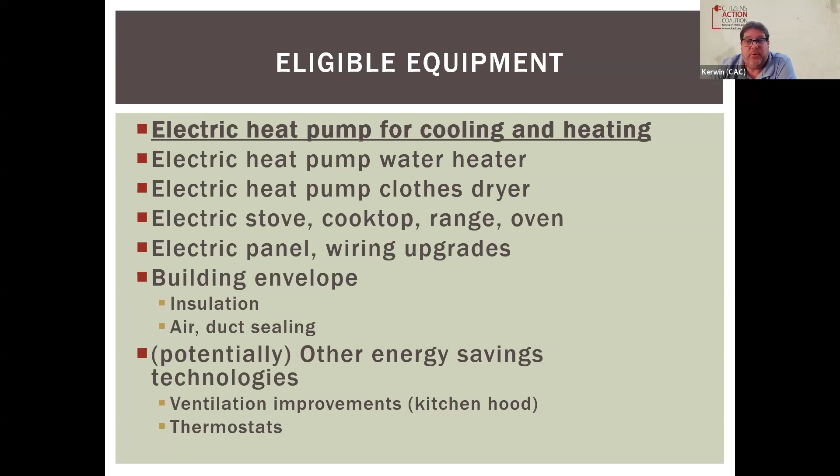Just real quickly, the home electrification and appliance rebates program. First of all, the first bullet there is about area median income, and that's an important data point to understand with respect to these two programs, especially the home electrification and appliance rebates program, which is targeted towards low and moderate income communities.

Households with incomes above 80% of area median income, but below 150% of area median income, will be eligible for rebates of 50% of the costs of eligible projects, up to a total of $14,000.

Households with income below 80% of the area median income will be eligible for 100% of the costs up to $14,000 for the household. Another exciting component of this program is that it's available to multifamily and rental units - in units where 50% of the households are below 150% of AMI, the rebates available will be 50% of the project costs up to $14,000 a unit.

Now, in multifamily and rental housing where more than 50% of the households collectively are below 80% of AMI, it will be the lesser of 100% of the project costs, or $14,000 per unit.

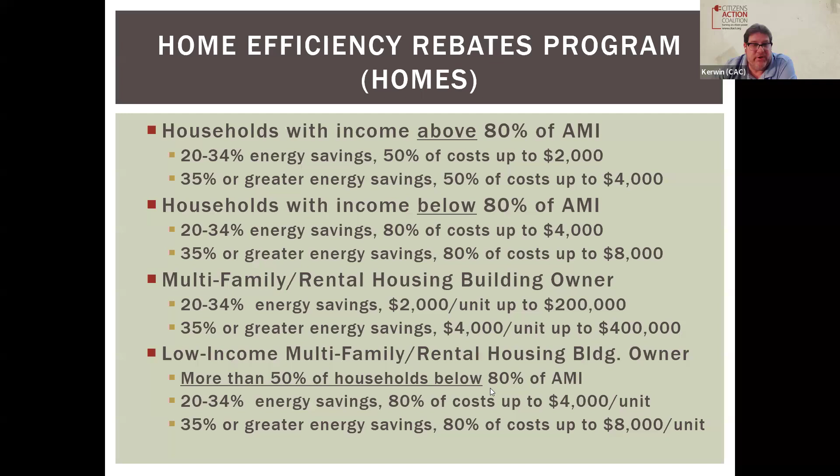This program is also available to multifamily and rental housing units, distinguished by whether it's low income multifamily rental housing, where the rebates will be higher, meaning more than 50% of the households in that multifamily property are below 80% of AMI. There are quite substantial rebates and incentives available to the owners of those properties that we hope will be taken advantage of.

Just real quick on what's going on in Indiana and when we can expect these programs to be launched. I took this directly from the Indiana Office of Energy Development's website. There will be links later in this presentation to all of these websites that will be archived on our website. But as it is right now, they are developing the blueprint for the program.

Sometime in Q3 of this year, they will be submitting the plan to DOE. DOE will review the application. Sometimes that can be a slow process, but it'll be in the hands of the DOE sometime in Q3 of 2024, with hopefully approval of the application and preliminary funding being released later in Q3 of 2024, with a hopeful program launch by the end of the year in Q4 2024.

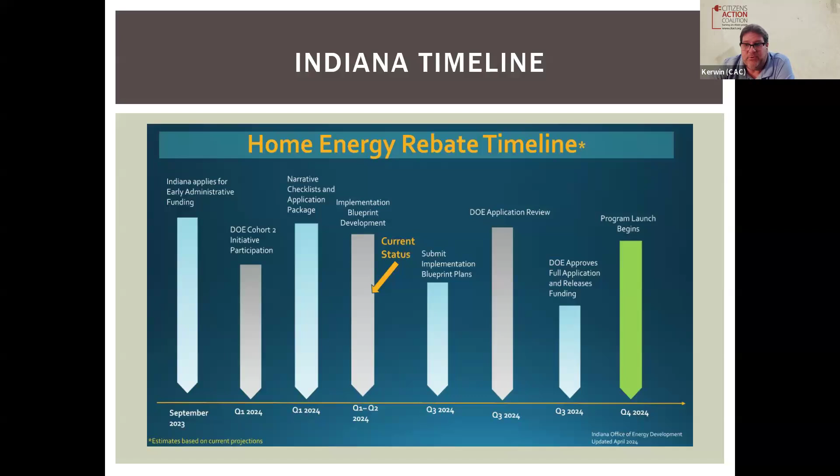So hopefully these rebates and these incentives will be available in Indiana before the end of the year.

Quickly, as I said, the program is currently being developed by OED and their contractors. They are conducting in-person listening sessions for folks with ideas, concerns, or suggestions related to how these programs should work and flow. There was a session last week in Gary, but there are three in-person listening sessions coming up: one in Indianapolis, one in Evansville, one in Fort Wayne.

There will be a link to the OED website where all of that information is available and where you can register. We'd encourage people to attend those in-person listening sessions if available. You can also submit a comment or suggestion to OED directly on their website, there's a link for that. We'll be sharing these slides, so no need to write the long link down, but you can submit comments and suggestions. They'll finish it off with a virtual closing session at 6:30 p.m. on June 27th, which I believe would be prior to ultimately submitting the plan to DOE for approval.

There also is a place on the OED website to sign up for updates on the home energy rebate program. You can get on that list and you'll get an email update on what's going on and if there's anything you can do.

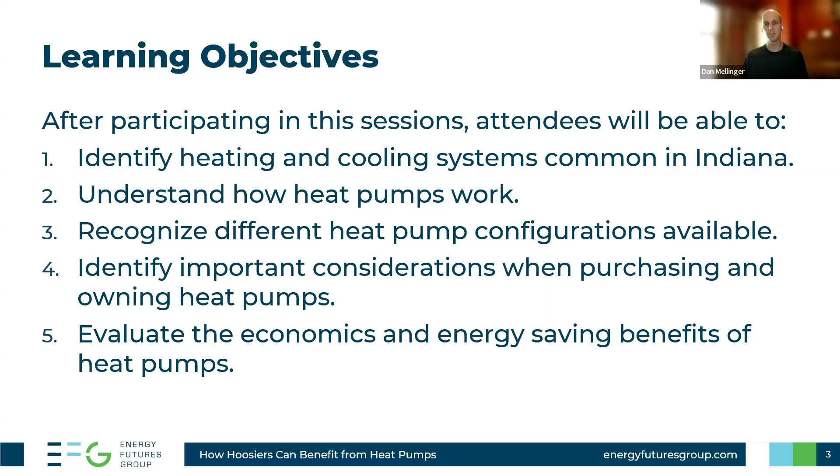To start, I just want to get everyone on the same page of what the heck a heat pump is. What are we talking about? Heat pumps are a type of HVAC equipment that can efficiently provide heating and cooling to both homes and businesses. Most of my discussion here is going to focus on heat pumps for residential use, but they're very applicable to commercial uses as well. They can be used in almost any climate to keep your home at a comfortable temperature year-round.

Instead of burning fossil fuels, making heat directly, like what you do with natural gas or propane, heat pumps use electricity to transfer heat between spaces. That is the most fundamental and important thing to understand about heat pumps. They don't generate heat, they move heat.

In fact, they use the same basic technology as a refrigerator, which moves heat from inside the compartment to the air around it. And that's why if you stand near the refrigerator and it's running, you're going to feel hot air coming out of the back or underneath the refrigerator. The system inside the refrigerator is moving heat from inside the compartment to the air around it. And that's exactly what heat pumps do for space heating and space cooling.

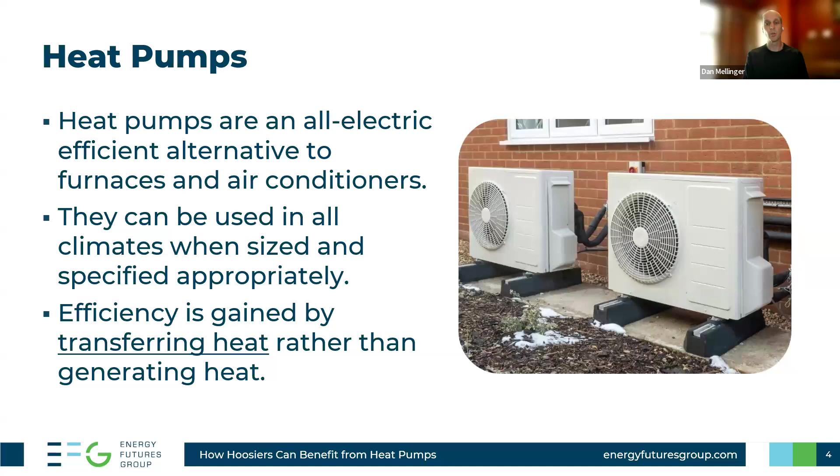Unlike your refrigerator, which only works in one mode, cooling, heat pumps are reversible, meaning they can provide both heating and cooling for the space. And as you'll see, heat pumps can be up to 3 times more efficient than a traditional heating system.

Heat pumps are often thought of as a new or emerging technology. That's often the way they're categorized, but in reality, the technology has been in use for nearly 100 years. They've been gaining more interest and traction recently due to advances in performance, increased ability to operate in cold temperatures, and general energy and climate awareness.

Inverter-driven technology, or variable speed technology, which is fundamentally used in cold climate heat pumps, was introduced more recently. On this timeline, you can see in 2001 inverter-driven technology, invented in Japan, was first introduced to the United States. With that, the ability to operate in a wider range of temperatures became available, which is part of the driving force behind the interest and adoption of heat pumps more recently.

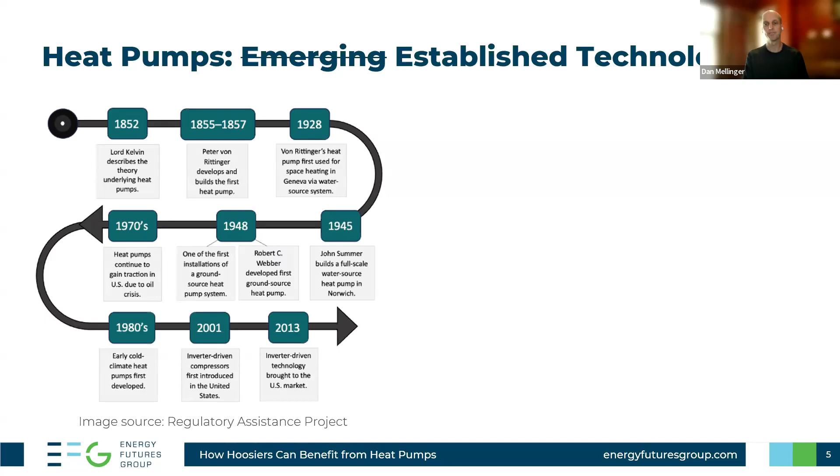The heat pump sales track record is very reflective of an established, high-performing technology. In fact, in 2022, heat pump sales meaningfully surpassed gas furnaces for the first time. Clearly, this is no longer a niche or emerging technology—it's well-established with a decades-long track record.

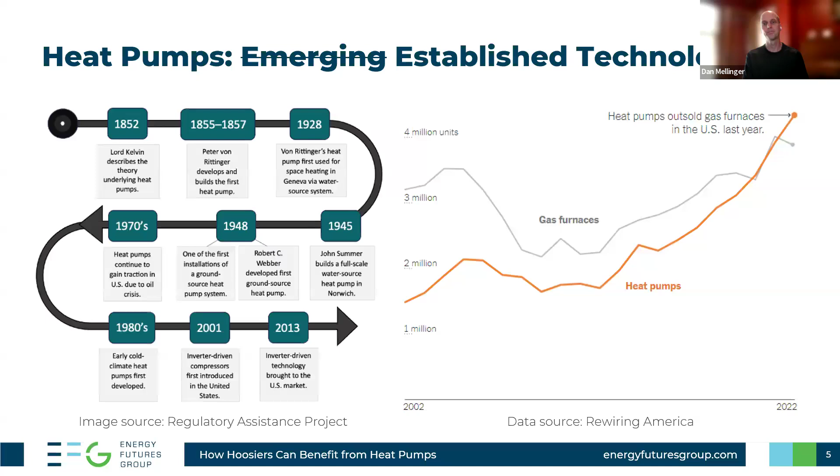Before I get too deep into heat pumps, I'd like to discuss the various ways that Hoosiers heat and cool their homes. Having this knowledge about existing heating and cooling systems is fundamental to understanding the opportunities for heat pumps. So we're going to cover how Indiana homes heat and cool, and then come back to heat pumps in more detail.

Central furnaces distribute heated air through a network of ducts, and they're often installed in combination with a central air conditioner, using the same network of ducts to provide both heating and cooling. Central furnaces can be powered by natural gas, propane, or electricity.

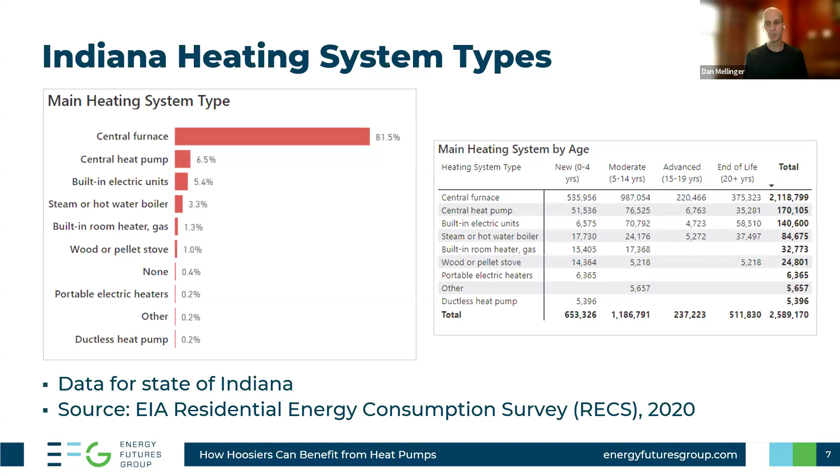And fourth are boilers. Now, I know that a Boilermaker refers to locomotives, but I was still surprised to see that boilers are installed in only 3% of Indiana homes. I'm assuming these homeowners must be Purdue fans—I can't imagine many IU fans would be excited about having a boiler in their basement.

Heating systems, of course, require a source of energy, and it's not surprising to see that natural gas leads the way in 65% of homes. Next is electricity, very prominent at 26% of homes, being used to power either electric furnaces or a form of electric resistance—that could be electric baseboard or some other built-in unit. Heat pumps are part of the electricity category.

Notably, there's a higher rate of electricity used for heating in lower income homes—that's what the graph at the right is showing. The green area shows the percentage of homes that use electricity for heating, and the lowest income homes, the column at the left, show the highest percentage of electricity used for heating. If you dig into this, you realize almost all of this is electric resistance, which is the most expensive to operate and least efficient form of heating. Higher income homes, meanwhile, have a greater share of natural gas heating.

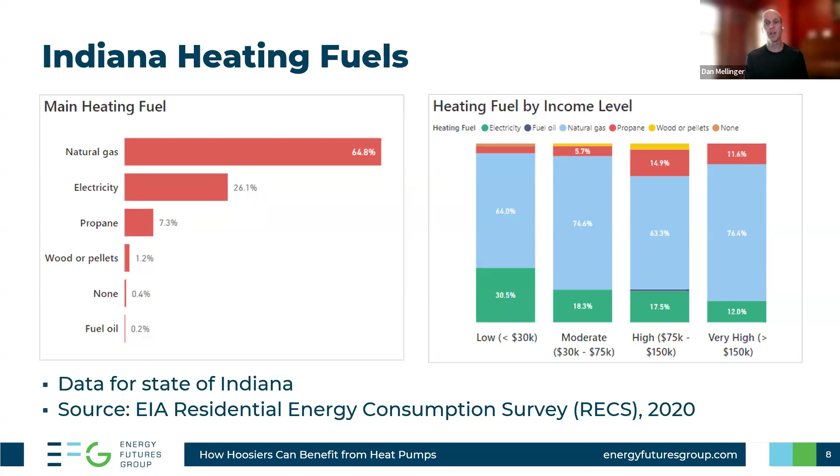Propane is the third most common fuel type for heating at 7% of homes. After that, very few homes are heated by wood or fuel oil.

In reality, if you were to look at your fuel bill for any one of these fuels, it's going to be in a different term, such as dollar per therm or CCF for natural gas, or gallons for propane, or kilowatt hours for electricity.

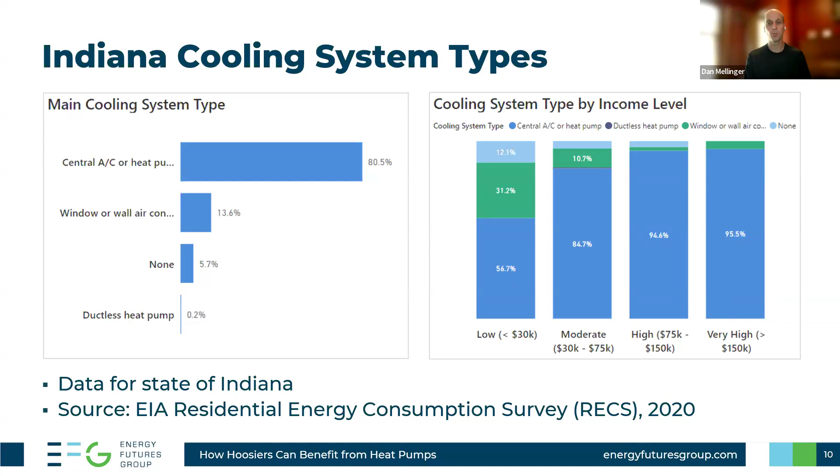So now that you have a basic understanding of the various ways that Hoosiers heat and cool their homes, let's go back to heat pumps and get into the details of how they work.

First, that refrigerant absorbs heat from the outside air, which can occur even at temperatures below zero. The refrigerant is then compressed, which concentrates the heat and forms a high pressure vapor. This superheated vapor is pumped inside the building and distributed into the warm air to increase the temperature of the space. After that heat is released inside, the now cooled refrigerant travels back outside, expands, and the process repeats - it absorbs heat, gets compressed, sends it back inside, and moves in that cycle over and over again.

By moving the refrigerant around, we're pumping heat energy in a useful direction, and that's where heat pumps get their name. That's why the term heat pump applies to both cooling and heating. In heating mode, you're pumping heat from the outside to the inside. In cooling mode, you're pumping heat from the inside to the outside. It can be a little bit of a confusing name - heat pump sounds like it only provides heating, when in reality it provides both heating and cooling. The technology is just pumping heat in different directions.

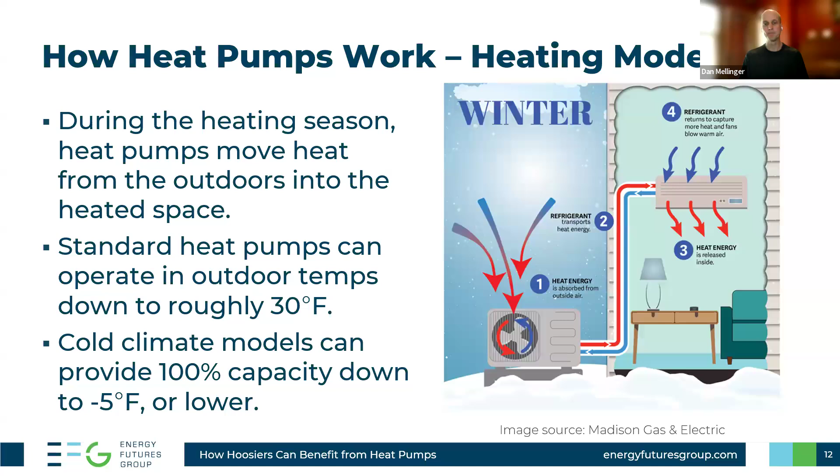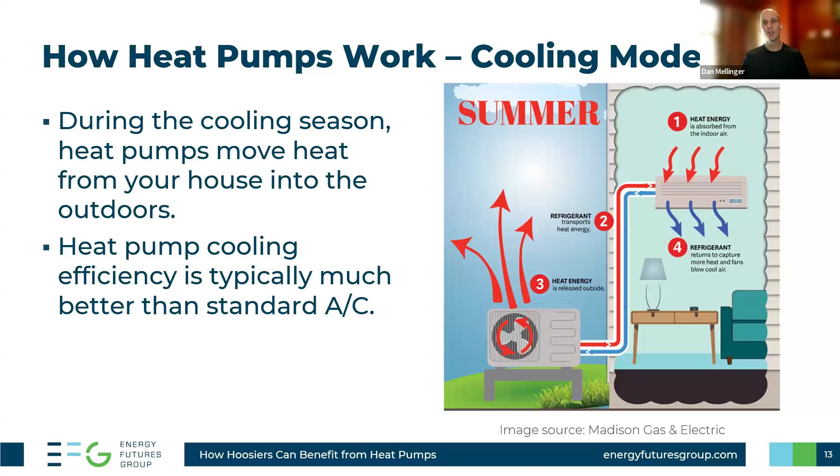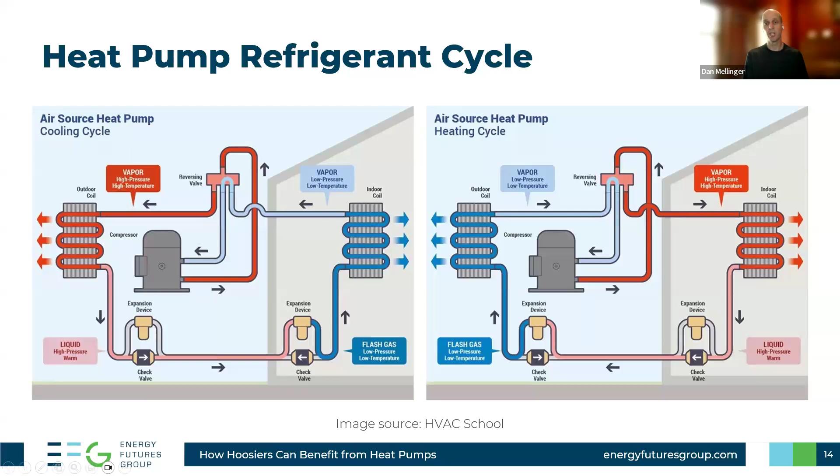There are four broad categories of heat pumps to be aware of. Most of our discussion is going to focus on air source heat pumps, which transfer heat to and from the outside air. Air to water systems also use the outside air as the source, but on the indoor side, it transfers that heat through a water loop.

Usually that would be in something like a radiant floor heating system or a baseboard water system. Ground source heat pumps, also known as geothermal heat pumps, transfer heat to and from an underground source. It could be a well, just earth underground, or a water source such as a lake. Lastly, heat pump water heaters transfer heat from the air around it into a water tank. I'm not going to be covering heat pump water heaters in detail here today, but I did want to include it as one of the categories.

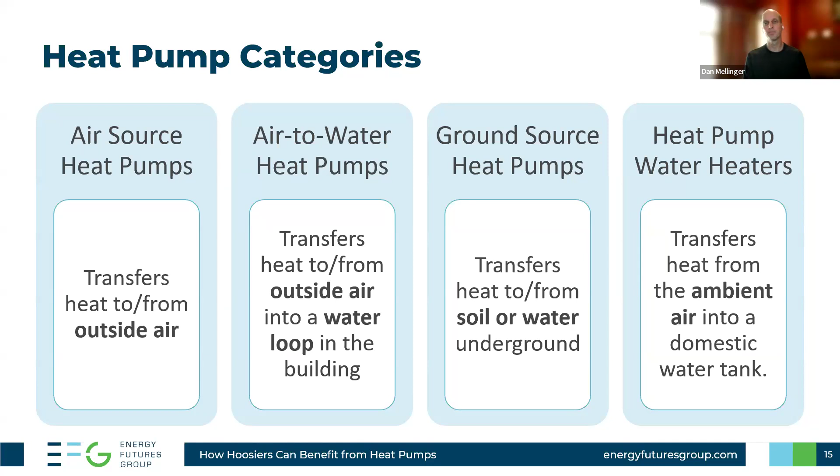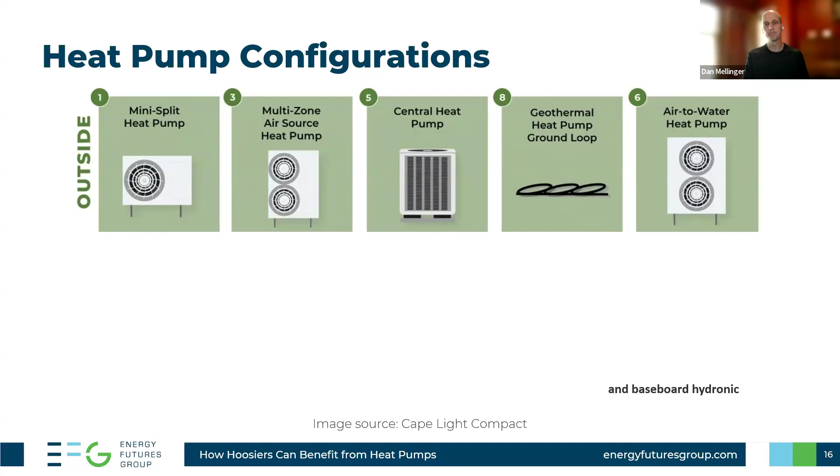So here are the components that would exist indoors. You can have a ductless wall-mounted unit shown in the lower left. This is called a head, which can be easily mounted in individual rooms or in small spaces, working with the mini split outdoor unit, box number 1.

Central heat pumps send their conditioned air through ducted vents, exactly like a central furnace or AC. So what you see on the inside would be an air handler, which I'll show a picture of in a minute, and that feeds the network of ducts. For a ground source or geothermal system, you have an indoor unit that manages the pumping, and that sends a heated or cooled fluid into an air handler or pipe network for distribution.

And finally, an air to water system would connect with a radiant floor or baseboard hydronic piping system, such as shown in number 9.

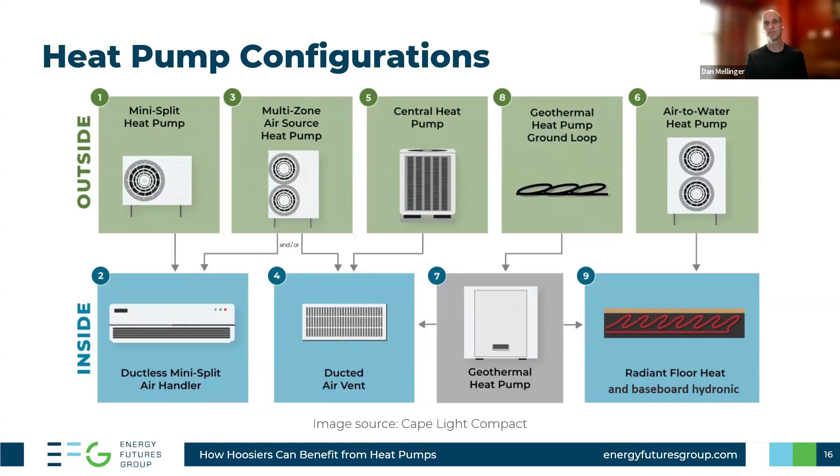So here are a few actual pictures of those components. The outdoor units shown on the left can be wall mounted or ground mounted. If you live in an area that receives snow, the unit has to be installed on a stand to provide clearance.

That typically isn't the case for an air conditioning unit because it's not operating in the wintertime. So if snow is covering that AC unit, it's not a problem because it's not being used. But since a heat pump is providing both heating and cooling, you do have to make sure that it's up high enough to provide clearance from any snow.

For a centrally ducted heat pump, the indoor air handler shown on the right, this tall unit here is an air handler, looks nearly identical to a furnace air handler. So if you have a furnace in your home that provides central heating and cooling, you're going to have something that looks a lot like that in your basement or your garage.

For a ductless heat pump, refrigerant lines run to an indoor unit that's mounted on a wall, or it could be in the ceiling, or even low on the wall, sitting on the floor.

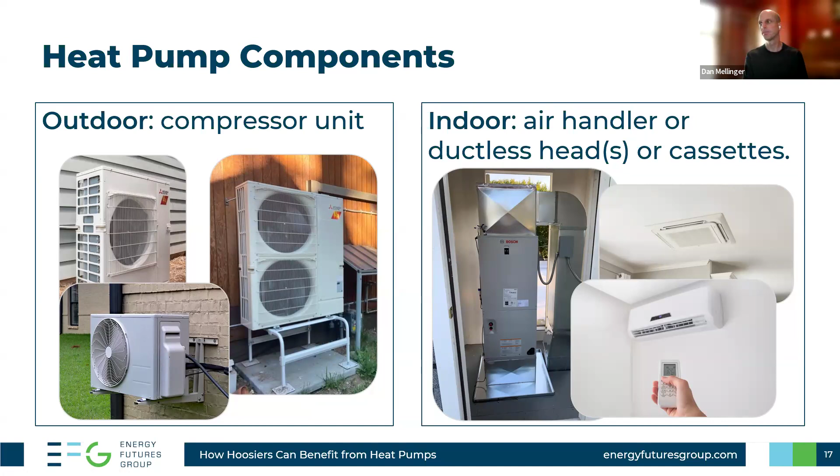Air source heat pumps come in two varieties, standard and cold climate. Standard heat pumps have been around the longest, and cold climate heat pumps are a more recent development. Cold climate models provide homeowners with the ability to use heat pumps in very low temperatures, down to as low as minus 22 degrees Fahrenheit.

With a cold climate model, it's unlikely that a home would need a secondary source of heating in Indiana's climate. In some climates, such as northern Michigan or Minnesota, you might be reaching that cold temperature, or even colder, for more than a handful of hours, and you would want or need a backup heating system. But in Indiana's climate, it's likely that a cold climate system could provide all of the heating needs throughout the winter season.

As a real world example, my EFG office in Vermont has cold climate heat pumps without any source of backup heating. And of course, our winters in Vermont are much colder than Indiana, with a climate more similar to northern Michigan.

Dual fuel systems pair an electric heat pump with a gas furnace to provide complete heating coverage across all temperatures. These systems have controls to manage a switchover operation, and at a certain outdoor temperature, the primary heating responsibility switches over to the gas furnace.

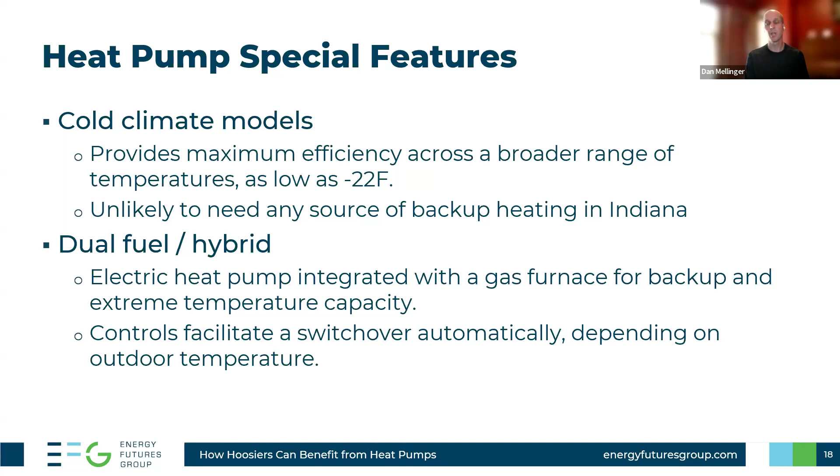Just like with hybrid cars, dual fuel systems are a compromise between efficiency and temperature range. With a hybrid car, the parallel would be driving range. So it's a compromise, and in some situations, a dual fuel or hybrid system can make sense depending on the climate that you live in.

Let's take a look at some of the heat pump benefits, which I've already touched on in the course of introducing heat pumps, but I want to dive a little bit deeper into some of these. Energy efficiency is the most prominent benefit, and the one that we hear a lot about.

When evaluating efficiency, we look at the heat energy delivered in BTUs divided by the energy input, also in BTUs. By looking at it this way, we get the value in percentage terms, and we can perform this calculation for any fuel type, just by converting that fuel energy into BTUs.

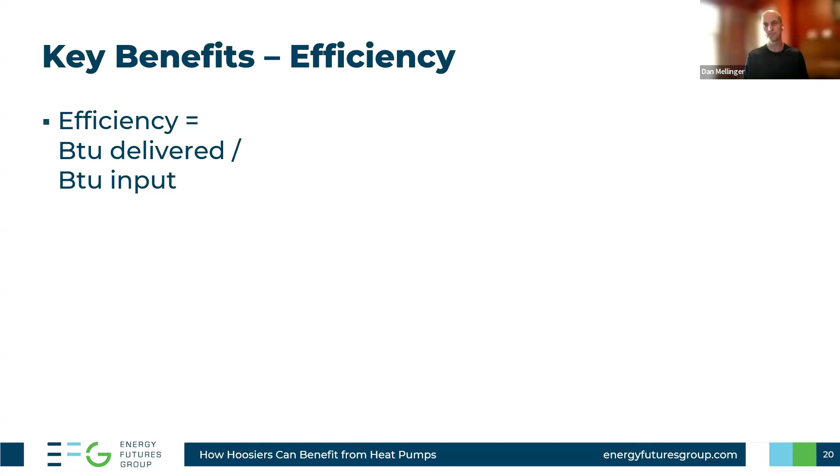Starting with electric furnaces, they're 100% efficient since all the energy input is converted into usable heat. On the surface that sounds pretty good, but later on when we look at the economics, you will understand why that's not so good. Next are natural gas and propane furnaces, which are between 80 and 98% efficient.

With these systems, there's always some amount of energy that's lost due to the system exhaust. That exhaust has heat energy in it that's going to be lost to the outside, and that results in an efficiency penalty. The minimum standard of 80% was established quite a long time ago in the 1970s.

Most furnaces sold today are around 90 to 92% efficient. And it's possible to get furnaces that are 95 to 98% efficient, which means very little energy is being lost in the exhaust. Those are the types of systems that can be directly vented through the wall.

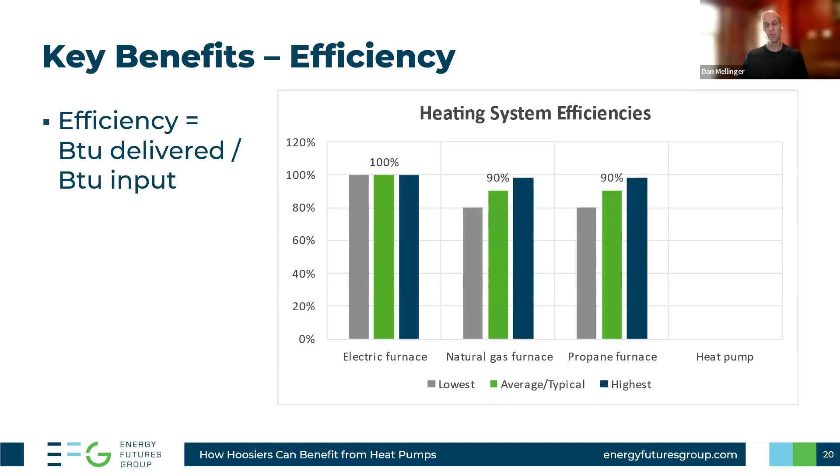Things get much more interesting in terms of efficiency when we look at heat pumps. Seasonal efficiencies of 276% are common and could be as high as 380%.

These efficiency levels that I'm showing here: the gray, the lowest efficiency, is based on the minimum qualification criteria among the utilities in Indiana. The green, 276%, is based on the average of Energy Star qualified models, and the blue is the highest performing Energy Star qualified model.

Now, seeing a figure like 276% efficient can be confusing. Generally, we think of maximum efficiency at 100%. So how can something be more than 100% efficient?

For this, we have to remember that heat pumps transfer the heat rather than generating it. And if you look at that formula for efficiency, if we can deliver more heat by transferring it than the energy content it takes to operate the system, we can get efficiencies that are very high, such as we're seeing here.

So what this is saying is for that green system, it's delivering 2.76 units of heat, transferring 2.76 units of heat for every 1 unit of electric energy input. This is the key to why and how heat pumps have such a significant gain in efficiency.

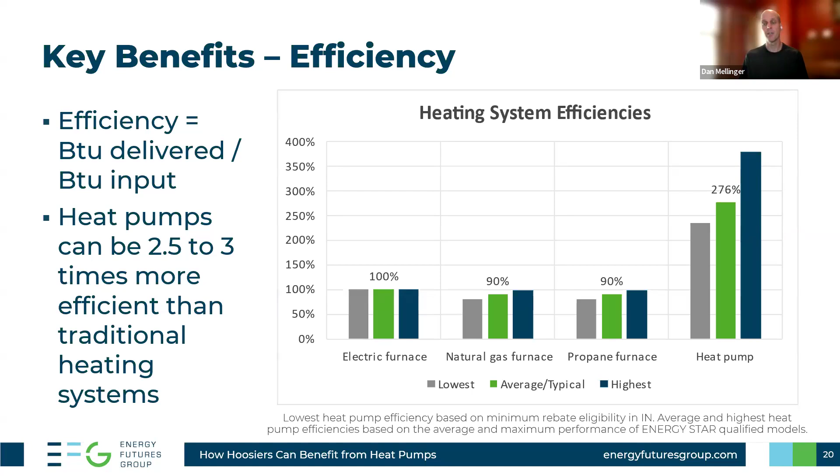And this is going to have a really important effect on the system economics, which I'll be looking at in just a bit.

There are other energy-related benefits beyond efficiency. In comparison to other heating fuels like electric resistance or propane, heat pumps can deliver significant cost savings. Furthermore, electric rates tend to be more stable over time, unlike fuels, and moving to electricity can provide an emissions benefit, especially as the grid decarbonizes over time.

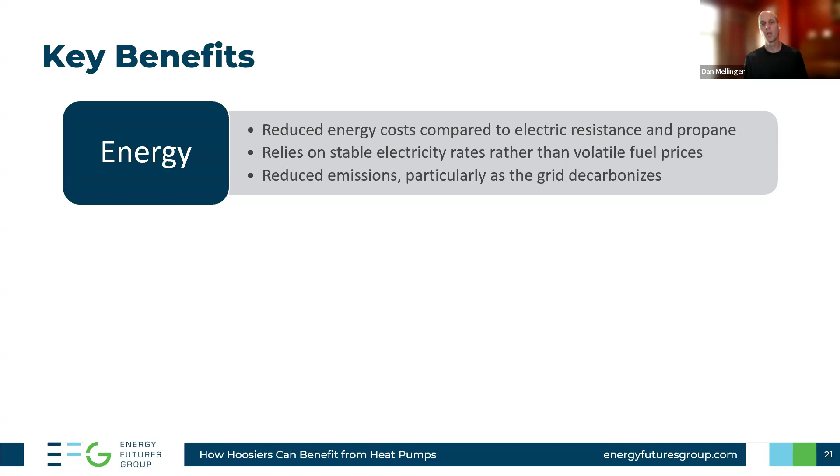I mentioned the flexibility benefits already, such as the ability to provide both heating and cooling, and the variety of configurations available. And in terms of comfort, heat pumps are whisper quiet. In fact, this is one of the first things I noticed after installing heat pumps in my home—you can barely hear them operate, both inside and outside. We previously used window units for air conditioning, which of course are very loud inside and out, and now all of that noise is gone. There are also some comfort benefits in terms of very consistent temperatures and their excellent ability to dehumidify.

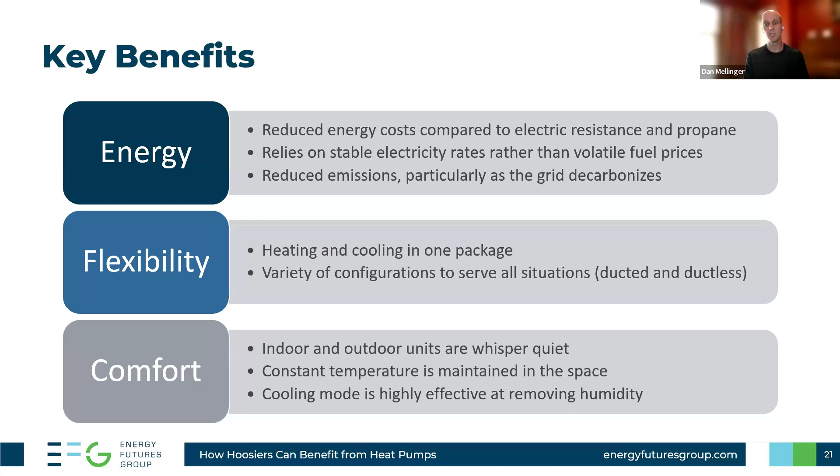As with any technology, there are several things to be aware of when it comes to installing and operating heat pumps. The most common issue you've probably heard is that heat pumps don't work in the cold. And there is indeed a low temperature limit to heat pump operation, but many cold climate models can deliver full capacity down to -5, and some can even achieve full output in temperatures as cold as -22 degrees Fahrenheit. Temperatures below these extremes are rarely observed in Indiana.

The chart that I'm showing here is from a heat pump manufacturer, Mitsubishi, and it's showing the capacity or output across a range of cold temperatures. For a standard heat pump shown in gray, the capacity starts to decline at around 35 degrees Fahrenheit. The cold climate models, meanwhile, maintain full capacity down to +5 Fahrenheit for the system shown in blue, or -5 degrees Fahrenheit for the system shown in red. And below these temperatures, the output starts to decline.

So backup heating may be necessary depending on the situation. Certainly, if you're installing standard heat pumps, you're going to want a backup heat source. Or if you're installing cold climate heat pumps in an area where you expect temperatures to exceed the cold temperature rating of the heat pump, then a backup system would be needed. And if a heat pump isn't properly sized, then a backup system is also necessary. Backup heating can be provided by an existing furnace or even an electric resistance coil.

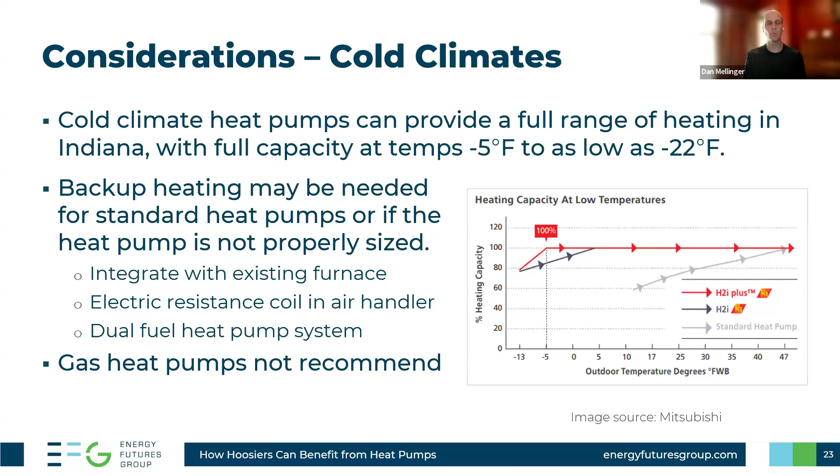Finally, a quick note that gas heat pumps are another technology out there—heat pumps that are almost entirely operating on natural gas. And these are systems that I don't recommend. They do provide a marginal efficiency gain over a furnace, but if you're investing in heat pump technology, it's far more beneficial to install a fully electric version than a gas heat pump. The efficiencies of an electric heat pump far exceed what can be delivered in a gas heat pump.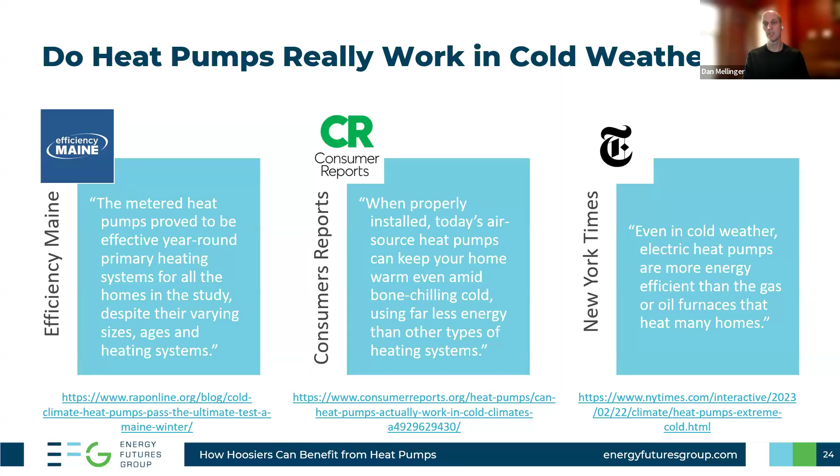Consumer Reports notes the importance of a proper installation, and to that I would add proper equipment selection, such as model selection and sizing. Working with a contractor on both of those details is really important to maximize the performance of a heat pump system.

Many of us use thermostats that have a setback schedule to reduce space temperatures overnight or when the house is empty. But with heat pumps, it's best to set them and leave them, other than for multi-day absences. This is because heat pumps need to work harder to recover from a deep setback, and the efficiency penalty during this recovery negates any gains from the setback if it's only for a few hours.

As with any piece of HVAC equipment, regular maintenance is required, such as filter cleaning and annual checkups.

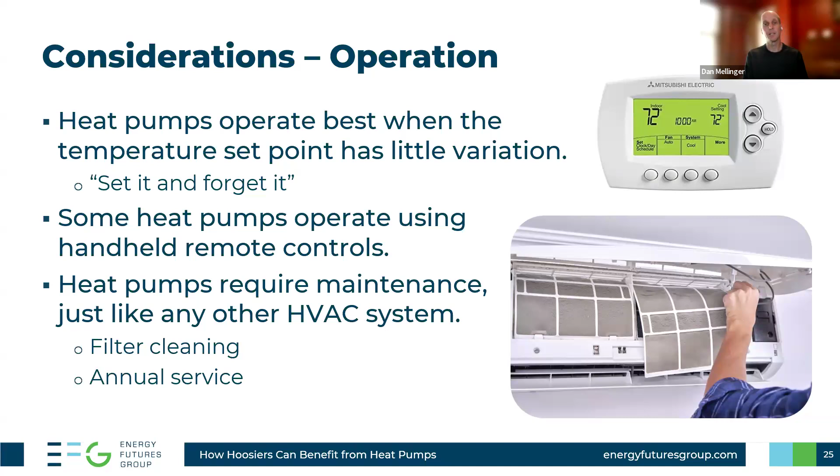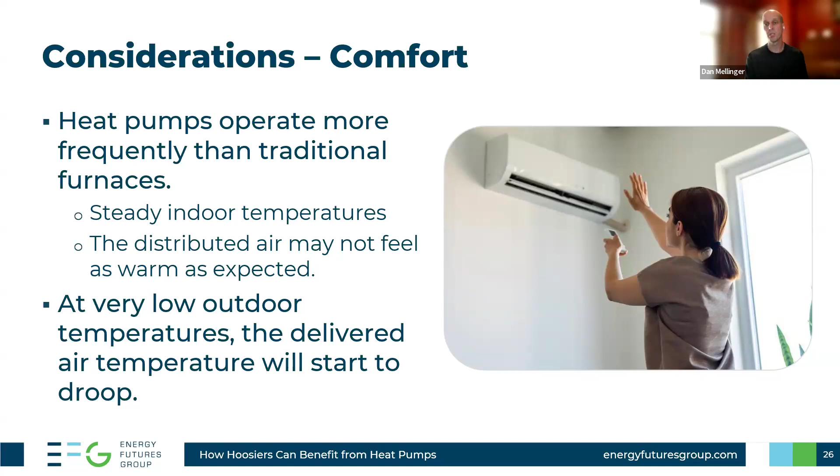Traditional furnaces operate with very hot bursts of air. You hear the furnace kick on, you might feel that hot air moving through the vents. Heat pumps, meanwhile, operate at a lower temperature with generally lower fan speeds to more steadily heat the air. As a result, the air coming out of the vent may not feel quite as warm as expected, even though the space temperature is being maintained. And as I already mentioned, at very low temperatures, the temperature of the air coming out of a heat pump or the ductwork would start to droop unless a backup heating system is in place.

Weatherization has nothing to do with heat pumps directly, but the benefits can really compound when combining a weatherized home with heat pumps. If done before a heat pump project, the homeowner can lower the equipment cost since a heat pump can be right-sized to the new, more efficient heating load. And once the heat pump is installed, the operation cost is then even lower.

Weatherization can also reduce or perhaps even eliminate the need for a backup heating system. So weatherization before or during the time of a heat pump project is always something that I recommend.

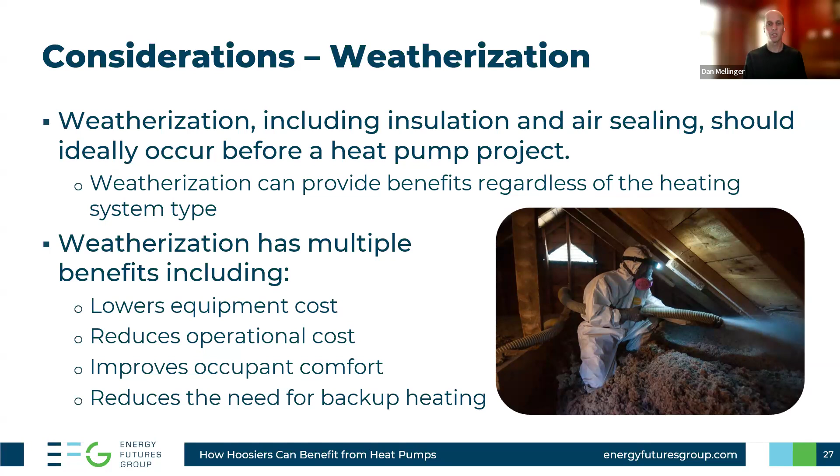All right, let's talk dollars and cents, the economics of heat pumps. First, I want to go back to the fuel price history for electricity, natural gas, and propane. Remember that these prices are in dollars per million BTU, representing the cost of energy delivered to the home. But we haven't yet considered the efficiency of the system—this is just at the point of delivery.

To understand the operational cost, we need to factor in the efficiency of the different heating systems. Recall that electric furnaces are 100% efficient, or any form of electric heating is 100% efficient. Natural gas and propane are around 90% efficient, and an average heat pump is 276% efficient.

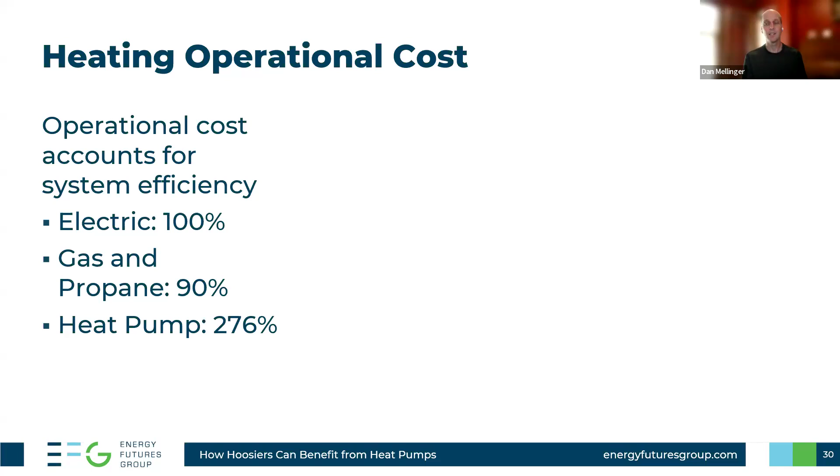When we incorporate these efficiencies with the fuel prices, now we can see and compare the operational costs across different fuel types and systems. First, notice the spread that exists between an electric furnace, shown in light blue, and a heat pump, shown in green. These are two systems, both using electricity, the same energy source, but the heat pump efficiency provides a significant economic advantage. The electric resistance system is generating heat directly from that electricity, where the heat pump is using the electric energy to move heat.

In fact, the heat pump efficiency allows it to be competitive economically with natural gas, shown in dark blue. A propane furnace in orange in the middle is more expensive and highly volatile over time. So this chart demonstrates how heat pumps can provide low cost and stable heating for Indiana homes.

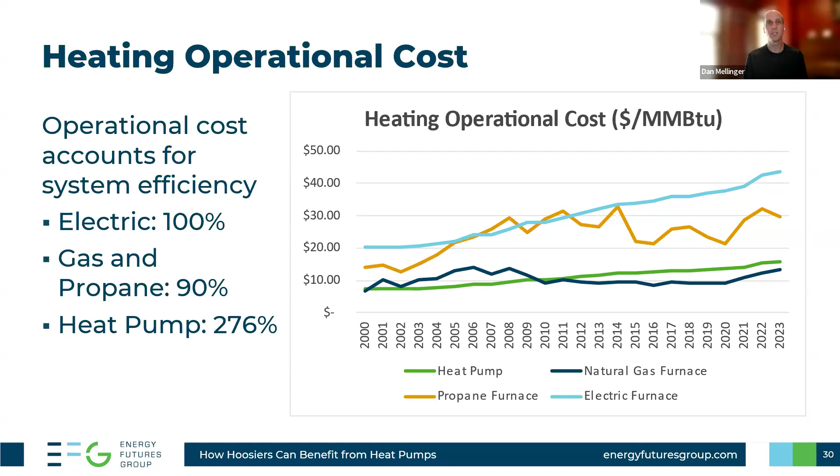On an annual basis, natural gas furnaces cost just under $700 to operate, and heat pumps cost just over $800. Propane is roughly twice as expensive at over $1,500 per year, and electric furnaces or electric baseboard heating systems are roughly 3 times as expensive to operate at $2,200.

This analysis is based on heating costs only. If we were to include air conditioning, heat pumps would be the lowest total operational cost since most heat pumps are highly efficient at cooling.

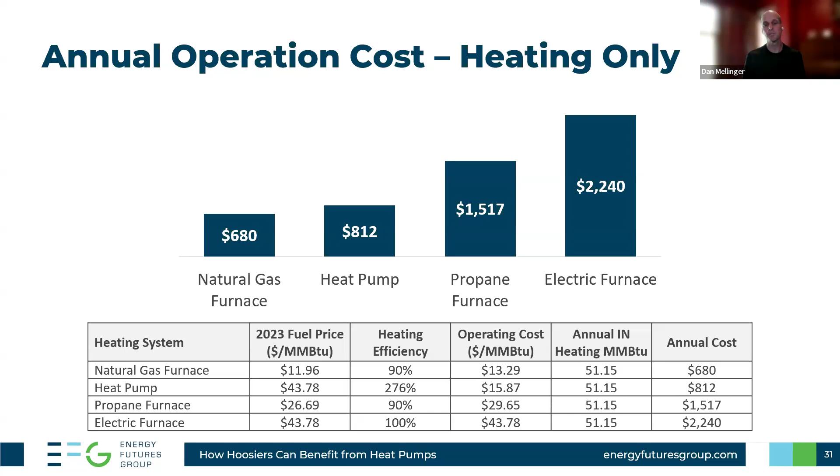Now that we understand the cost to operate these different systems, a few scenarios become clear winners for heat pumps. First, heat pumps provide a huge savings potential versus electric resistance heating. The same is true for propane heating, which is typically a furnace.

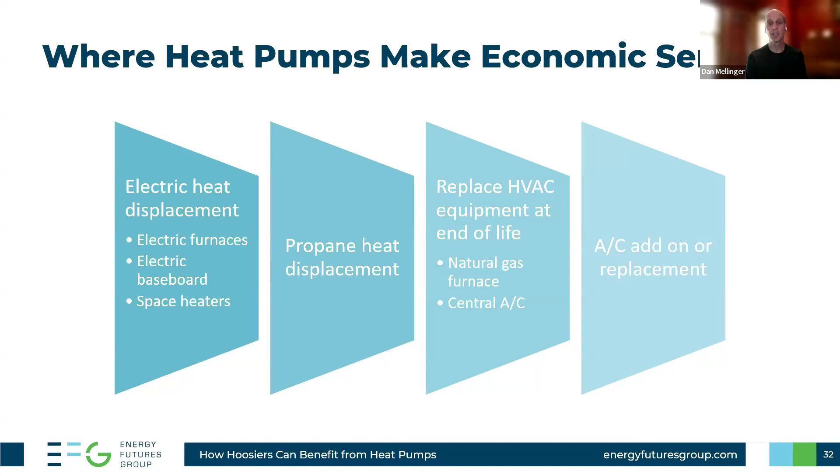Now, these opportunity buckets may seem nuanced and potentially niche, but as it turns out, a huge number of Indiana homes fall into these categories. First, the clear opportunities are those with electric and propane heating. This is more than a quarter of Indiana homes, almost 700,000, which have electric resistance or propane as their primary heat source. These homes will have a huge economic benefit in switching to heat pumps.

Next are the homes that are heating and cooling with equipment that is older than 15 years and will need to be replaced soon. This is another 500,000 homes, that first row in the light blue table. These 500,000 homes have natural gas heating or AC equipment that's at or near end of life. A catchphrase for these customers is: when it dies, electrify.

There are also homes that heat with inefficient gas room heaters, and homes where the primary cooling is window air conditioning units. Combined, these categories represent another quarter of Hoosier homes. And in total, more than half of the homes in Indiana would have an economic opportunity in converting to heat pumps.

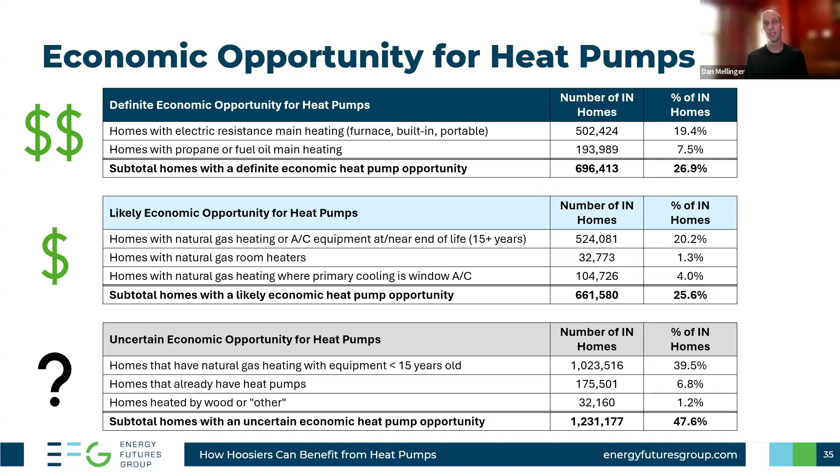What's left are the homes that heat with natural gas equipment that isn't yet near replacement age, homes that already have heat pumps, and homes that heat with wood. So while customers in these categories may not realize immediate economic benefit by upgrading to a heat pump, they may have other motivations to do so, such as price stability, flexibility, climate, or energy reasons.

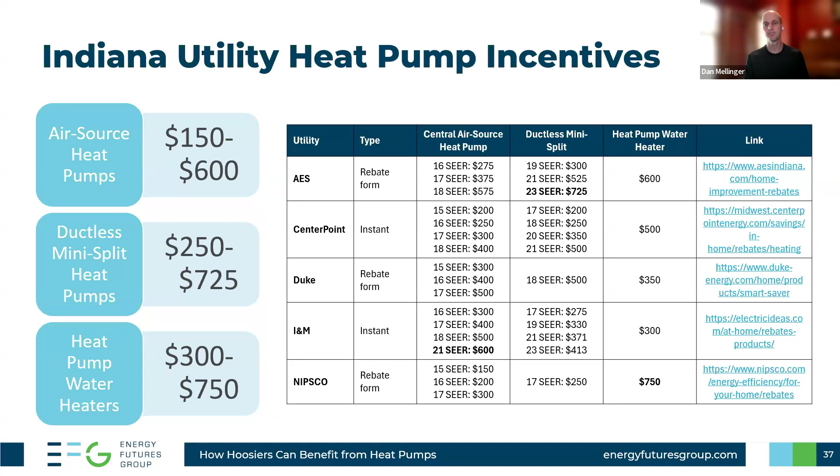Federal tax incentives are available right now through the Inflation Reduction Act, which can reduce the cost of a heat pump or weatherization project by up to 30%. And these are available now. The big funding that's coming to Indiana that Kerwin mentioned, and I'm going to talk about next, the $182 million, that has nothing to do with this form of the Inflation Reduction Act.

These are tax credits that are available now. There are no income eligibility limits, though a homeowner does need to have a tax liability to take advantage of these credits. And again, the credits for a heat pump are 30% of the cost, up to $2,000. And it's per year, these can be renewed each year. So you could do a heat pump project in 1 year, a heat pump water heater project in the next year, and be eligible for up to $2,000 each year.

The bigger component of funding is in the form of the home energy rebates. Indiana is one of the leaders here, one of the first states to complete their application for home energy rebate funding. There are now 17 states. Indiana submitted their initial application back in March, and the funding would total $181,891,000 and change. This is a significant funding opportunity that's coming to Indiana and states everywhere.